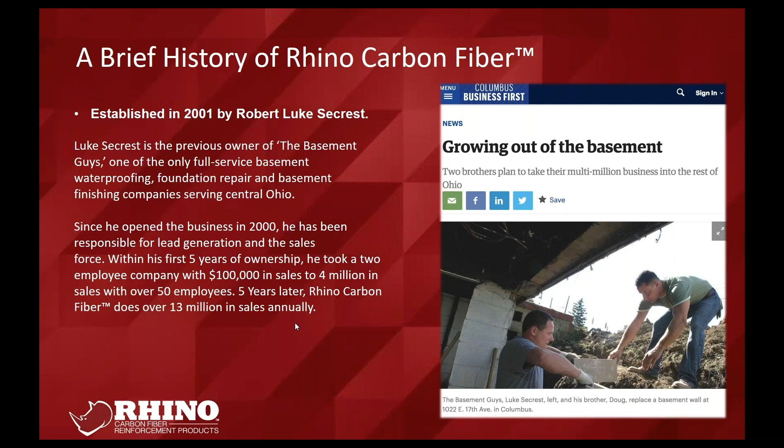So the Basement Guys was founded in 2000. In 2001, it was an early adopter of carbon fiber. We were actually using a different product at the time, and by 2003, the shortcomings of other products were excessive enough that Rhino Carbon Fiber was developed. The patented system was developed specifically for the application we're discussing today, bowed walls. We currently hold patents on that system in both the United States and Canada, and we have other products that are patented or patent pending worldwide at this point in time.

We do have a Canadian partner, a parent company, AGT Products. Their brands include Rhino, DRIcore, Barricade, and Insul Armor. So if you ever see the subfloor panel that you would put down in a basement on a concrete slab prior to installing any flooring, that's the company behind that.

Just a really brief back history on carbon fiber itself. It was actually discovered by accident when Edison was trying to develop the light bulb. That's when the filaments were discovered. He basically joked that it makes a terrible light bulb, but it's incredibly strong. Fast forward a little bit, in the 50s, the tensile strength was further developed and manipulated to become even stronger than it originally was.

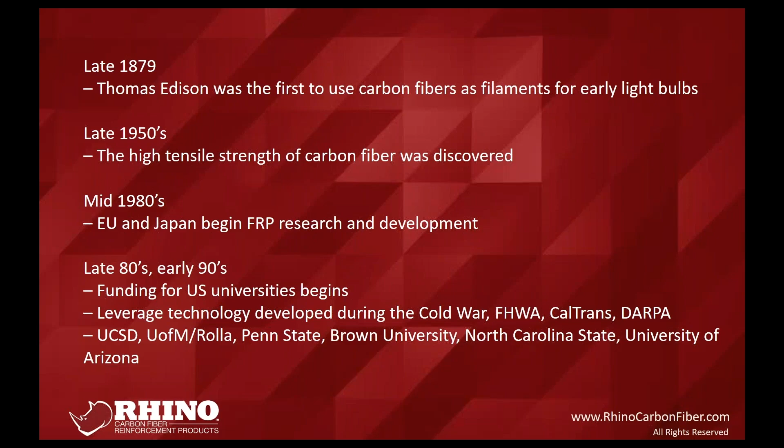When looking at a foundation wall, there are typically 4 stages of damage. You're going to have your soil expansion, and your cracks are going to develop at that point. That progresses into inward movement in varying degrees of severity. As that continues, you'll typically end up with wall shearing. That is when the wall basically slips off of the bottom block that's held in place by the concrete. And ultimately, if this is left unrepaired, you're going to end up with a wall replacement.

So we'll go through the different stages here. This is going to be your typical foundation wall. It could be block or poured concrete for the bowed wall application. It's universal. It does not matter which one you're working with.

So you've got your backfill here. Traditionally, it's going to be backfilled with stone, but a lot of times that doesn't happen. A lot of times it just gets backfilled with the dirt that was excavated on site. You end up with water that's naturally going to drain to that area. Poor downspouts, poor negative grade at the foundation wall there is going to cause excess water, and that is 90% of the problem when it comes to a bowed wall, that or the wall being totally unreinforced.

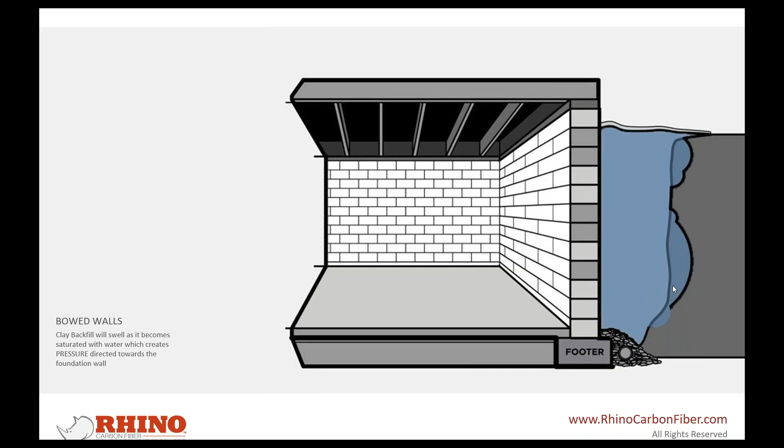Over time, as this water sits here, it gets in the soil. In parts of the country where you have seasonal changes, you're going to end up with freeze and thaw cycles that are going to basically cause this water to expand in the soil, and it's going to push it over time. That's going to be called your outside pressure.

As that continues, you're going to end up with cracking either in the blocks, mainly in the joints. For a bowed wall, you tend to see a horizontal joint that'll fail just below the surface there. That'll be what we call the hinge point of that wall. It could typically be the location with the most amount of deflection and pressure on that wall.

So you got stage 1 here, the cracks develop. Stage 2, you actually have cracks that are opening up. You'll sometimes see stair-step cracks develop in the corners. At this point, the wall has started to move inward.

That continues over time, and again, if unchecked, this is what the shear looks like. Basically, this wall just slides off of this block. This block can't go anywhere because it has dirt and then concrete on the other side, so it's held in place, but you'll end up with a wall that slips off of there.

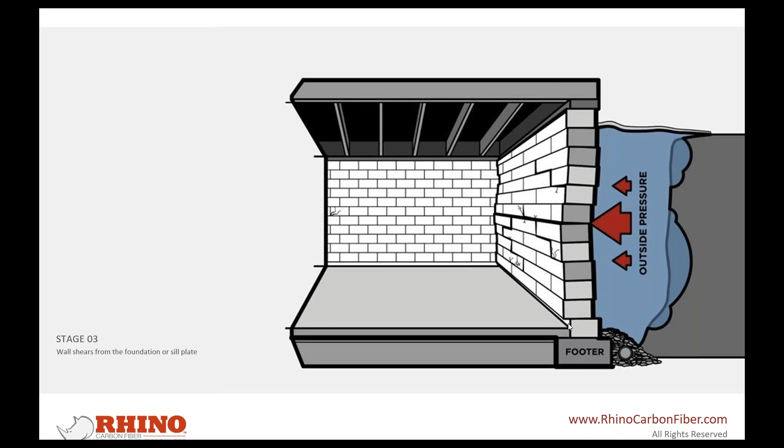And then this is stage 4. Some of you have probably seen this or been a part of it. It's not a particularly fun thing to do. Another method would be a wall push. Sometimes that's done in lieu of a total wall replacement, but if there's enough block damage and joint damage, ultimately the only option would be a total wall replacement.

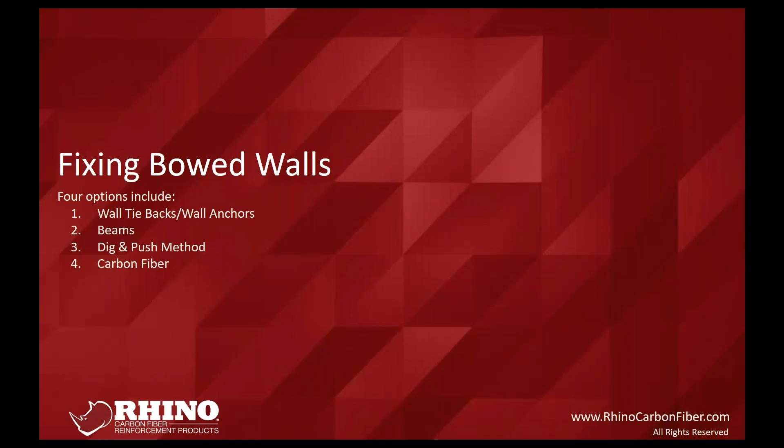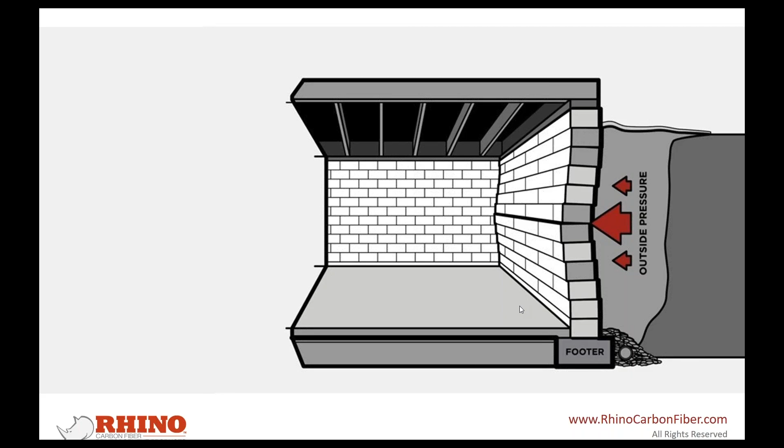So for fixing a bowed wall, there's quite a few different products on the market. We're going to go through them, some of the shortcomings of them, and some of them you can even use carbon fiber to help address some of those shortcomings. So you're taking your typical bowed wall, it's starting to move. You've had that pressure there for a couple of years, and the first one that is a very common one is going to be a tieback.

So they're fairly expensive. It tends to damage the block right around the anchor plate, just because there's enough pressure there trying to counter the forces being pushed on the wall itself. A lot of times excavation is required on the outside to be able to anchor that out. There are some systems where you basically push the rod out into the yard and then you have a plate that anchors out in the yard. Those are less invasive, but some of these systems require almost like concrete pilings or pads.

Some of the issues for homeowners would be the aesthetics of the plates themselves. They're pretty noticeable. And then, to say that you can't finish the basement, that's a little much. But if you do install a finished basement after tiebacks have been there, you have to basically install access panels so you can continually keep the tension on the rods themselves.

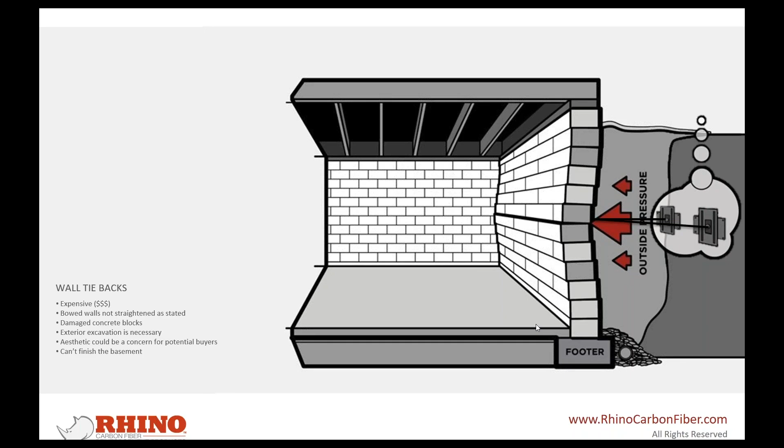So these are what your typical anchors would look like. They're going to be anchored out into the yard. You're going to have your rods that go to the wall, and then you have a corresponding plate on the inside. So these would be what you'd have to leave access panels for if a customer was planning on installing a basement finishing system after that.

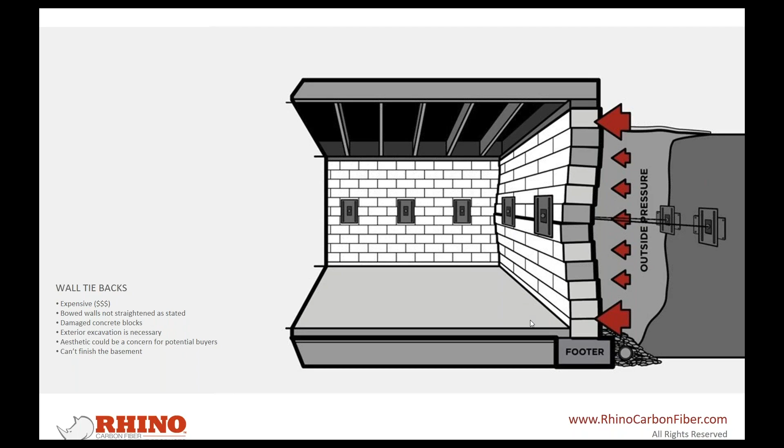So the problem areas would be you're not really truly supporting the wall in the other areas. So what this can lead to is either damage in this area, or this part of the wall can basically push if this pressure still exists, which most of the time it does, because a lot of times there's nothing being done to address the root cause of the pressures on the wall itself.

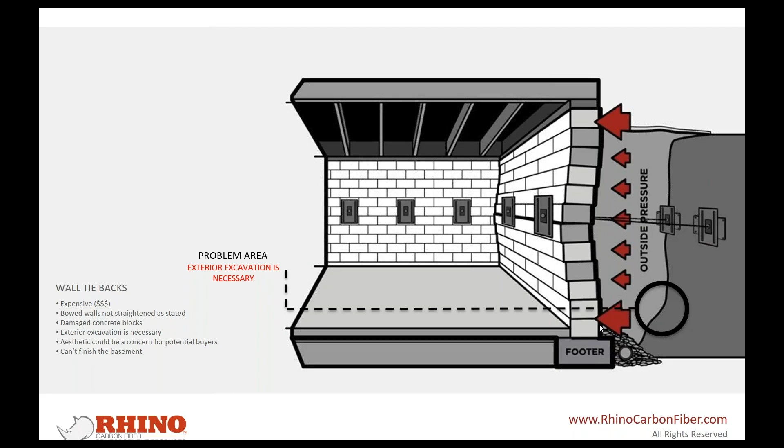So yeah, like we discussed, you've got excavation that's typically necessary, not guaranteed. And then you have shearing that can develop here or here because this is unreinforced. Now, some of our contractors that do install wall anchors, or when wall anchors are called for, they'll use a strip of carbon fiber to span from the top to the plate, and then from the bottom of the plate to the bottom of the wall.

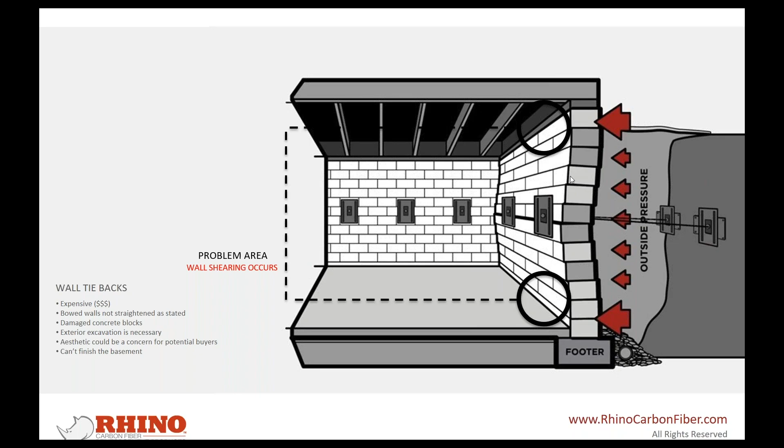What this does is it kind of helps tie everything together and helps redistribute that pressure. So this pressure that's continuing to remain is basically countered by the tensile strength of the carbon fiber. Some guys will even go as far as to create whalers of sorts with carbon fiber between these locations just to increase the load capacity of the wall itself. So that's something to keep in mind if you guys do install wall anchors or they're called for. Just be mindful that you can use multiple products to create a better repair.

This kind of explains the real drawback of some of the anchor systems that are out there. Not saying that all of them cause this type of damage, but it is a possibility if installed incorrectly. So this is kind of a bird's eye view of the top of the wall looking down into it. So these would be the hollows of your block.

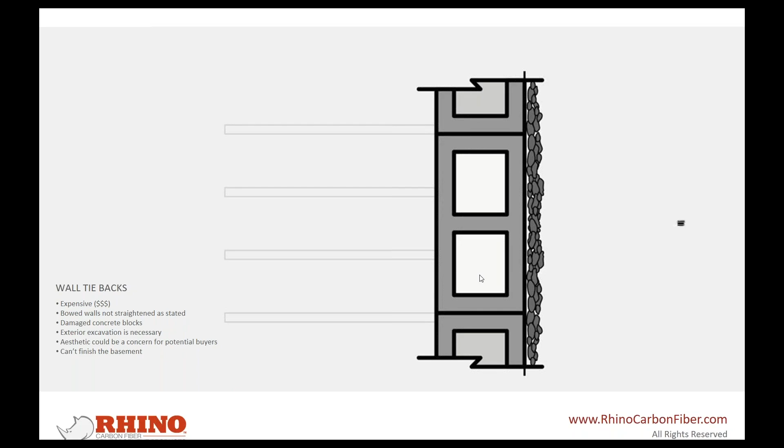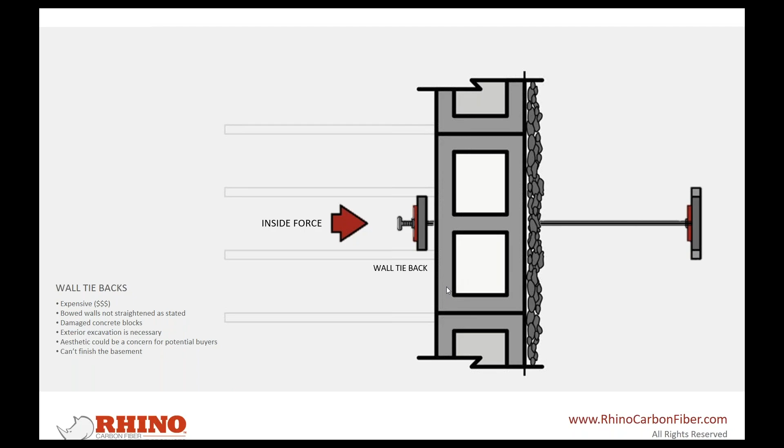So you have your rod that comes through your tie back plate, and as you basically install that and you create the force to get that tight and to keep the tension on this system to keep the wall from bowing inward, you basically have your inside force, your outside pressure, and over time you can develop cracks in the block itself, and that would essentially lead to crushed blocks or damage between the actual plates themselves.

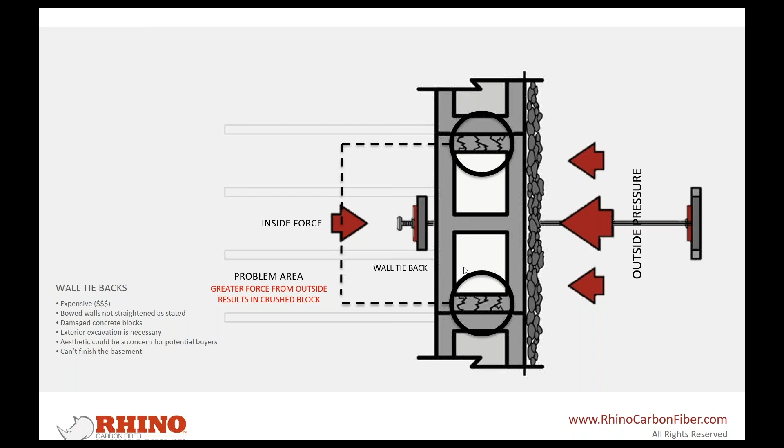The next one is probably the most common because it's been around the longest. This is going to be your stationary beams or just your typical steel I-beam that's installed in the basement. Drawbacks are they're fairly expensive. I mean, there are parts of the country where you can get steel for pretty cheap, but if you're the guy that's paying for some of the beam systems that are out there, you're paying quite a bit in shipping just to get it from door to door.

They're extremely obstructive. They stick off of the wall. You're going to end up with quite a bit of lost space in a finished basement scenario. They're very, very noticeable when your customers would go to sell their property. It's almost guaranteed that it's going to get noted on an inspection, possibly even find some issues with it just because of the amount of attention that it draws. That tends to be a little bit scary for prospective buyers.

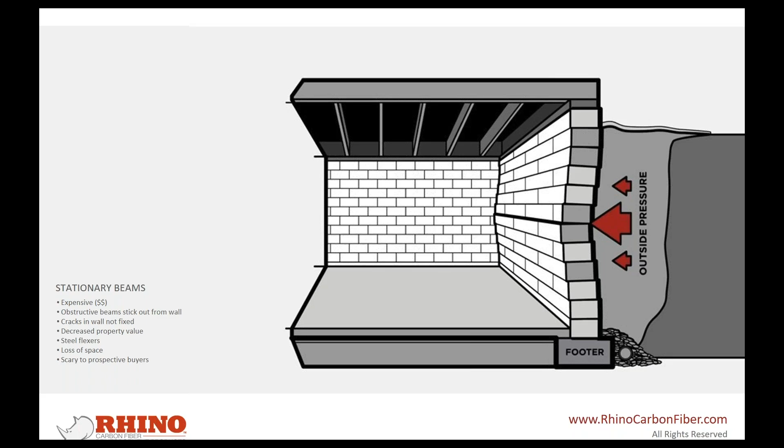And then there's just a lot of room for interpretation as far as how that process is done and done properly. There's a lot of different methods for installing steel beams. You end up with a lot of blocking in a lot of the situations. So we'll go through some of the differences here. So to start out, you're going to have to open up the floor to get the beam set on the footer itself.

Typically it's going to be a 13-pound I-beam that's called for. So that's going to be about 6 inches of steel on the wall itself. And then you basically concrete that back in place. Then you have your bracing up in the floor joists there. Typically code calls for a minimum of 5 joist cavities uninterrupted for proper bracing for the top.

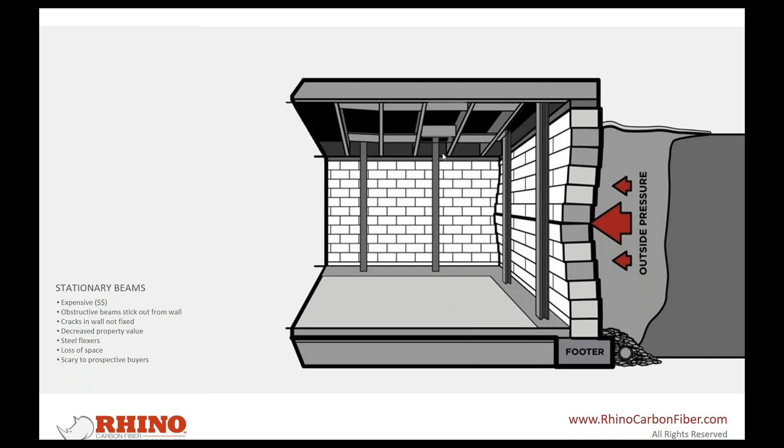If your joists are running parallel with the wall, you then have to basically use 6x6s and things of that nature to get those lagged in and tied in properly. So really it's extremely time consuming. You end up with a lot of lumber that has to be involved in that as well.

And then one of the shortcomings of that is you tend to tweak the floor joist when you do that. So you're basically taking this load and you're putting it up into the floor joist. And you're creating a situation where there's a lot of load on just simple 2x material that's not really designed to take that kind of load.

Another issue with steel I-beams is since this is a rigid, straight piece of steel, it's only really making contact with the part of the wall that's bowed the most. So that leaves you with cavities behind the beam and the wall itself. So you essentially have to backpack that with concrete. Pretty tough to get it done completely, to get really nice solid fill in there. It's something that a lot of guys really struggle with.

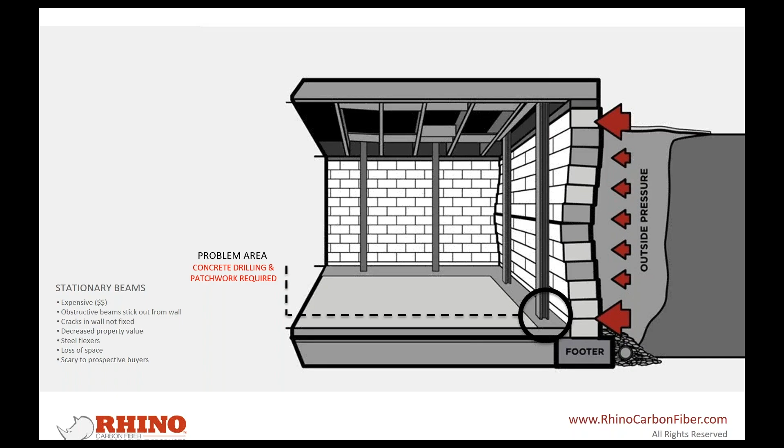It is time consuming, but the most critical thing with a steel I-beam is to get that area filled, and unfortunately that typically does not happen. If you don't do that, it allows the wall to basically continue to fail to the point where it hits that steel I-beam. So essentially the beam has to catch the wall before it actually is in tension. That's what's called wall shearing.

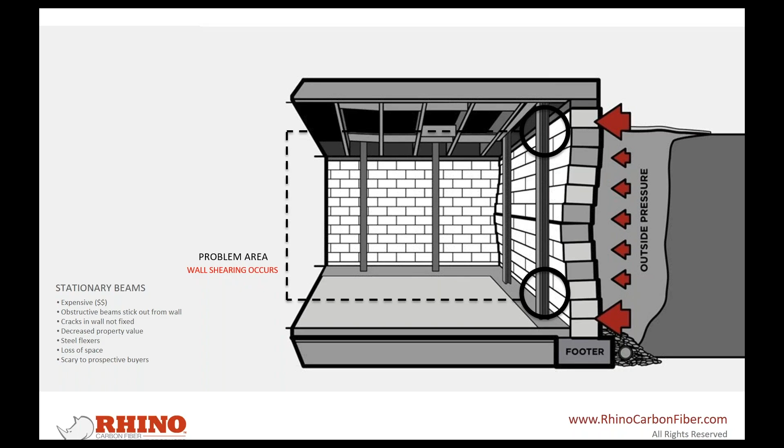So your power beams are going to be pretty similar to a steel I-beam. The main difference is they like to promote the idea that you're going to be able to straighten the wall. Again, the issue with this is because of the top bracket, you're putting a lot of pressure onto those floor joists, pretty much in excess of what that wood is capable of taking. So the opportunity for floor joists to bow or to break over time is pretty high.

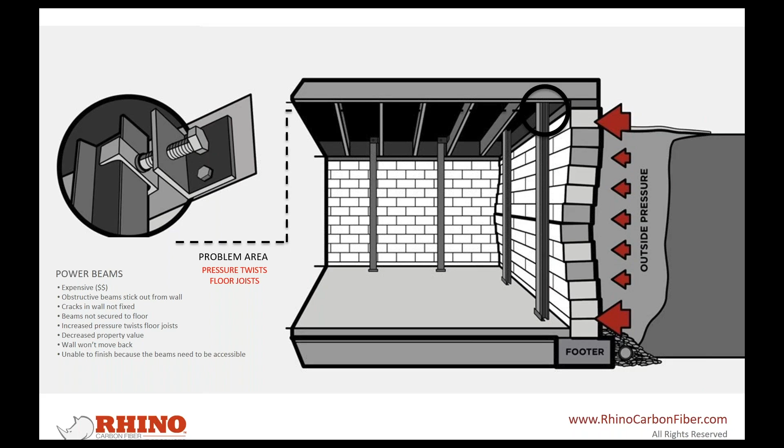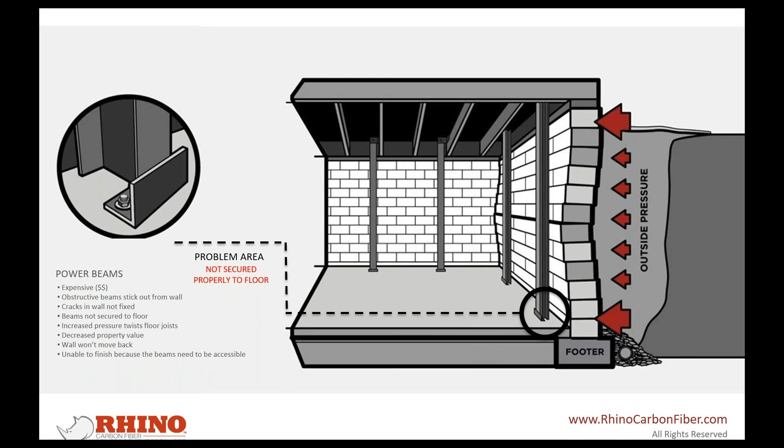You have a lot of the same negatives that you do with a steel I-beam as far as the application and some of the aesthetic issues of it. Again, your beams aren't going to touch the wall. But the real thing that is kind of bothersome is a lot of those systems don't actually remove any concrete. So you're essentially relying on 2 bolts into the concrete of an unknown thickness to hold that pressure at the base there.

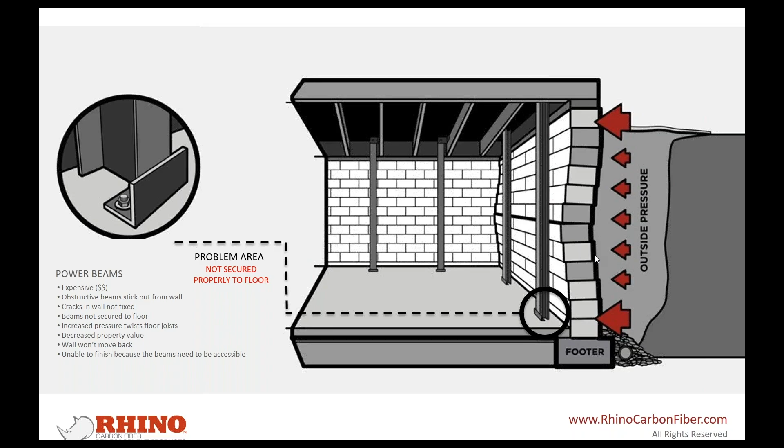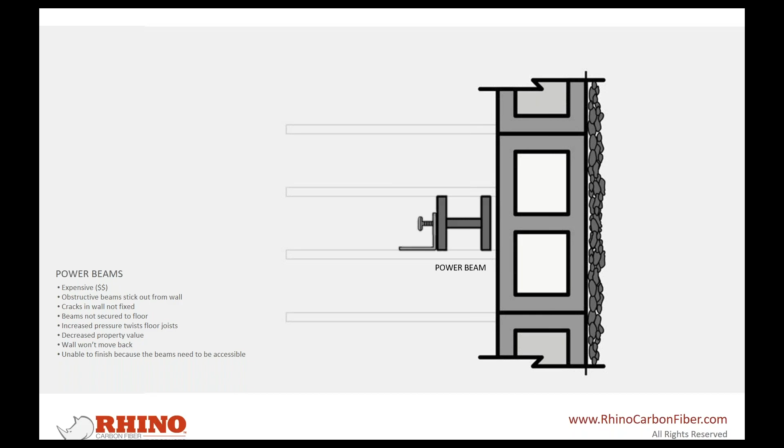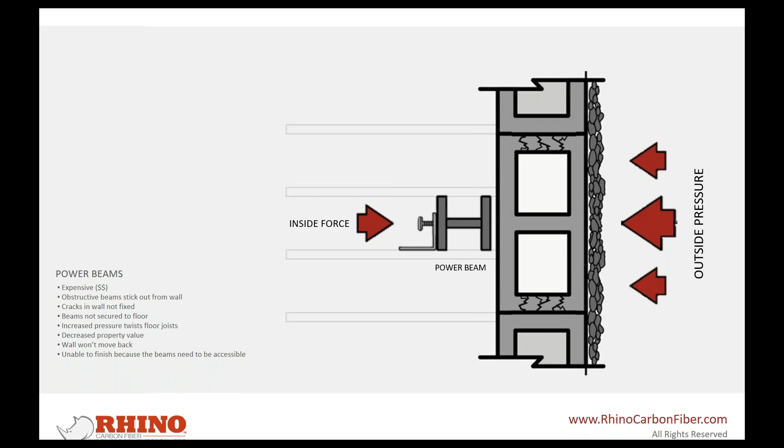This is again going to be kind of a bird's eye view of the wall itself. You've got your beam on there, kind of similar to a wall tieback as far as what you're exerting on the block itself. Again, your outside pressures, your inside force, very similar to a tieback. It's going to create damage to the block itself.

The theory of it sounds really nice. The practice of it is a little bit unlikely to happen. I mean, you've got tons and tons of dirt or gravel sitting on a wall. So you can think back to that slide that showed the pressures being put on the wall from the outside. If you just tell homeowners to crank on this thing a couple times a year, it's not going to take real long before they end up damaging the block.

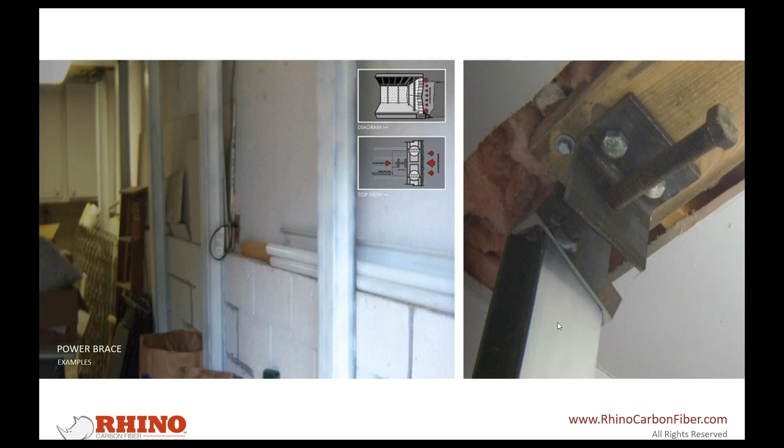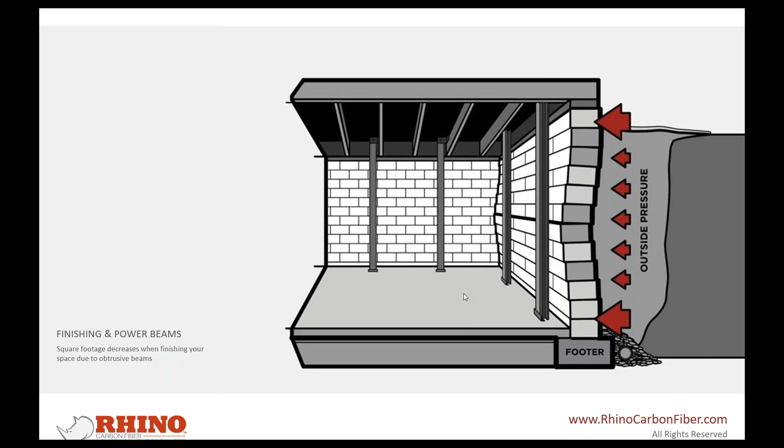So for a lot of people, the biggest shortcoming of this system would be the loss of space. You're typically going to have about 6 inches of steel on the wall. You have to frame away from that. So you're going to lose about a foot off the entire perimeter of the basement. So if you have a 20 by 20 basement, you just lost 80 square feet of living space.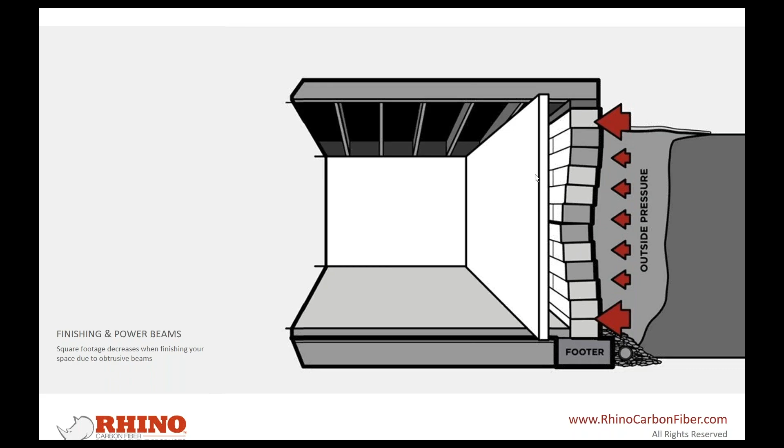For a lot of people, that's just not acceptable. They're not going to go through the added expense of finishing a basement if they're going to lose that kind of square footage. Not to mention, you're not really going to have a good feel for what's going on behind here.

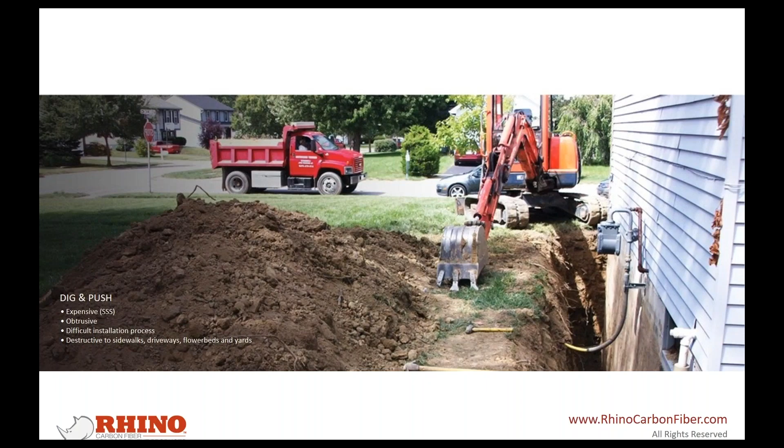So the dig and push is basically a last-ditch effort to save the wall. It's extremely time consuming, it's dangerous, and it still has to be reinforced after you get the wall pushed back into place. If you were to just push this wall and reset it, put the soil back on it, it would very quickly go back to where it was.

So this isn't a fix as far as permanently repairing the wall. You have to do something to reinforce the wall, or you'll be right back where you started.

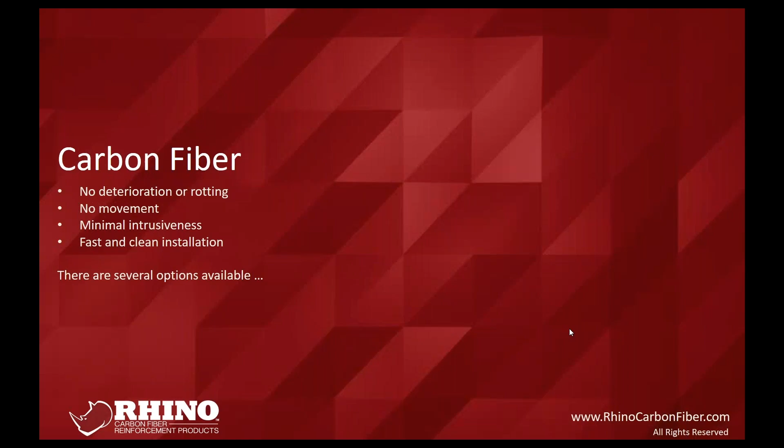So this is where the carbon fiber portion of it comes in. We're going to briefly discuss some of the other options that are on the market, just so you guys can be educated as far as where we're different from other systems in the market. But the benefit of carbon fiber in general, regardless of the manufacturer, is going to be no deterioration. It's going to limit the movement, or in most cases with our systems, it's going to completely stop it. It's going to be extremely minimally invasive, and it's fast and clean.

So the carbon fiber typically ranges, depending upon the manufacturer, anywhere from 4 inches to 12 inches wide. It just depends upon the manufacturer. There's a plate material that's on the market. It doesn't have any connections to the top or bottom. The epoxy is kind of difficult to get to bond to the plate, because you can't really tell if it's saturating properly.

But it's going to basically come up to the top of the wall, stop, and it typically stops just below the floor. That's going to be really common for most of these systems, because we're the ones that hold the patent on the top and bottom connection. So your outside pressures are here. They're pushing. The tensile strength of the carbon fiber band is doing what it's supposed to, but due to the lack of your top and bottom connection, over time, as that pressure continues, you end up with shearing, just like you do with the plates and the beams.

And this is where carbon fiber, in the infancy of it, engineers would say, well, yeah, it's going to hold the wall together, but is it really going to do anything to hold the wall in place? And the answer was no. And that was the issue we had with the system that we were installing way back in the early 2000s.

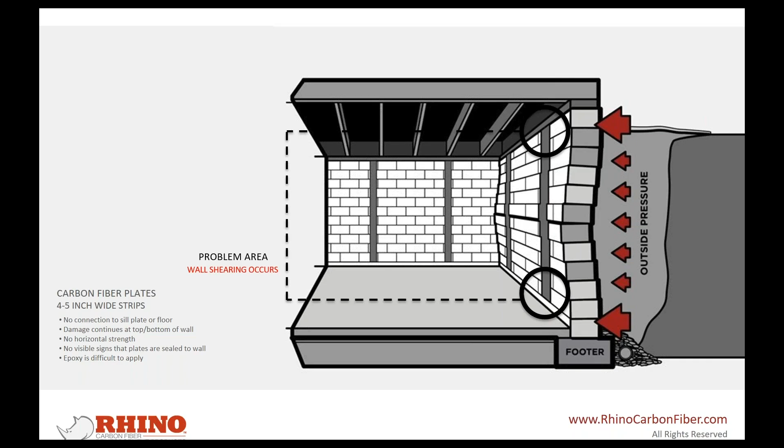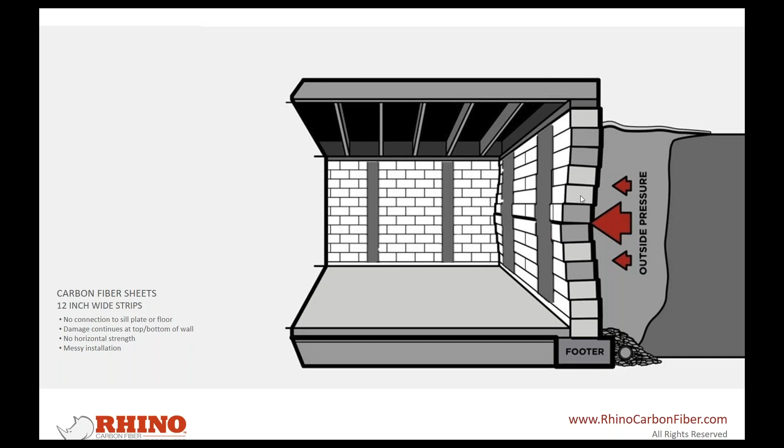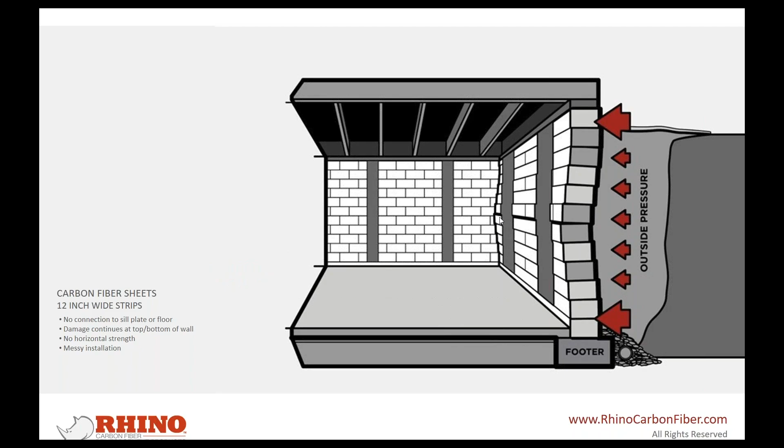So the next one is going to be your 12-inch wide strips. We use this for general crack repair purposes. We do not use it for bowed wall applications, simply because there are no connections with it. But there are some systems out there that use this to reinforce a wall. It's going to be the same scenario as the plate. You have no top and bottom connections, so the wall can basically shear in as one. And when you do this, you end up with a pretty bad failure.

Another shortcoming of the wider strips is you're encapsulating the entire face of these blocks, so they can't wick moisture like they're supposed to. Blocks are naturally porous. They're designed to channel the water. If you encapsulate the entire surface of a block, you run the chance of water being held in that block, and over time, the moisture will basically peel or delaminate the carbon fiber.

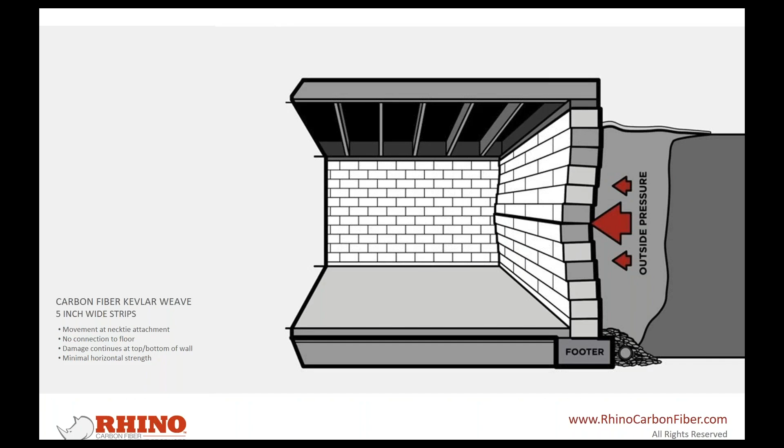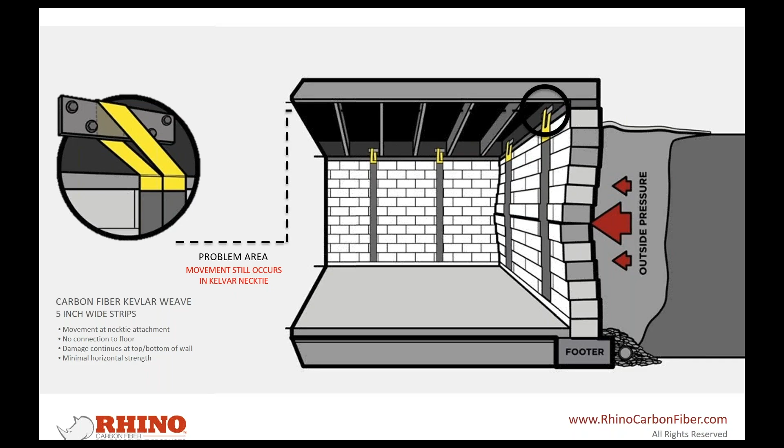So the next one we're going to talk about is the carbon Kevlar blend, the straps. I'm sure most of you on here probably know which ones we're referring to. They were the ones that originally came up with a top connection, and that was in response to the fact that they were starting to experience issues with walls shearing in. So they created a necktie at the top. The only problem is it's not really in tension. There is a way to get it in tension, but unfortunately, most of the time they're installed in a method where there is no tension present on that connection.

They're also installed into the rim joist rather than the sill plate, which is an acceptable method, but your opportunities for movement up there, due to the distance between the wall and the rim joist, are much higher than going into the sill plate itself. The real shortcoming of the system was you still had no bottom connection to tie in below the shear point.

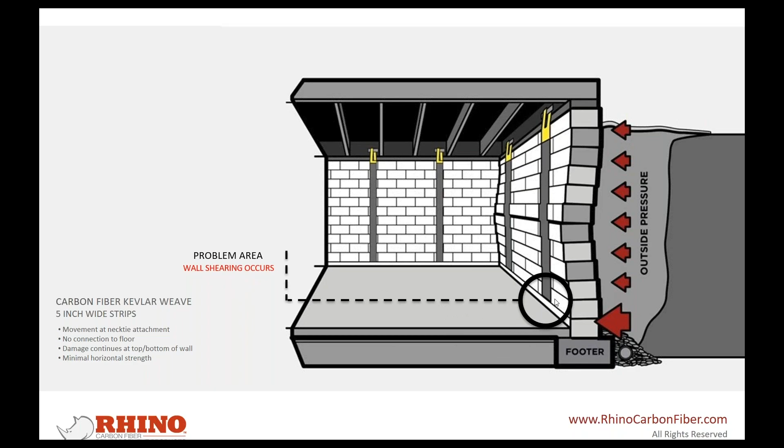And this is what happens when you have a wall that does not have any connection. Again, I oversaw this project. I received a call from somebody that had purchased this home several years before, hadn't really shown any signs of issues. She called late on a Friday, said, hey, I think I have a problem in my basement. I said, okay, fine. I'll have a guy come out, or as early as I can get there would be Monday morning. And she accepted that.

So the benefit of carbon fiber, as far as your space savings, this is going to be universal for all of them. It's going to finish smooth, flat to the wall. You're not going to experience any loss of space. Typically by the time you prep your walls, the thickness of the concrete that you removed is essentially equal to the thickness of the carbon fiber. So the fiber almost ends up being flush with the block around it.

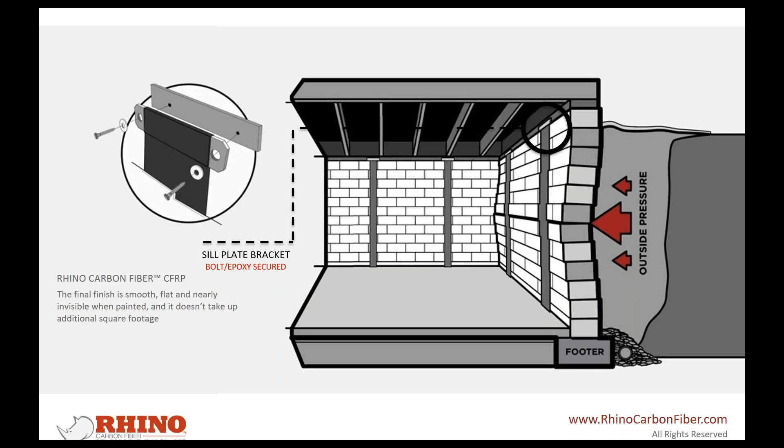And then for the bottom, we have our carbon fiber pin. Most of you guys that are on here, you know the process. But essentially the point of this is to get you into either the footing or into the slab itself. So as this pressure is exerted on the wall, this block can't slip because it has an anchor point below that final block that's held in place.

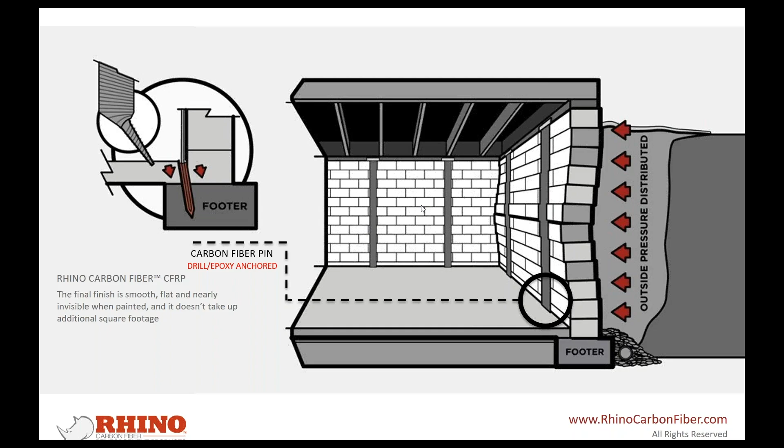As you saw from the previous pictures, it's obviously very important. We've been around for over 15 years at this point, and we've had 0 failures. And engineers basically spec this as a requirement now for bowed wall application.

Another benefit of our system is you can paint it. We've done everything from $10 a gallon, the cheapest paint we could find at Lowe's, up to high grade like Drylok systems that have fiber mesh in them for waterproofing, stuff like that. Everything sticks to it. We get the question sometimes as far as when to paint it, and it doesn't really matter. We have guys that'll paint when the epoxy is still tacky, or you can wait the 2 days for the total initial cure time on the epoxy. It doesn't matter, and it can even be done months later.

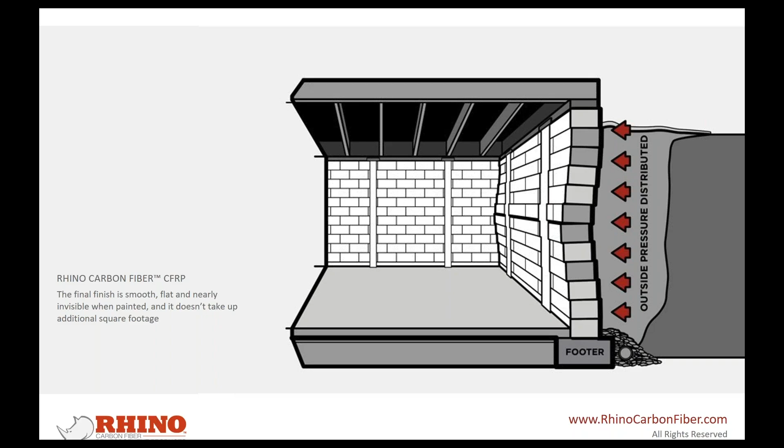We get the question a lot: is the sheen of the carbon fiber epoxy too slick for paint to stick to it? And the answer is no. The only thing that doesn't stick to it is the base coat of Drylok. So if you use a 2-stage Drylok, the base coat or the waterproofing agent won't stick to it.

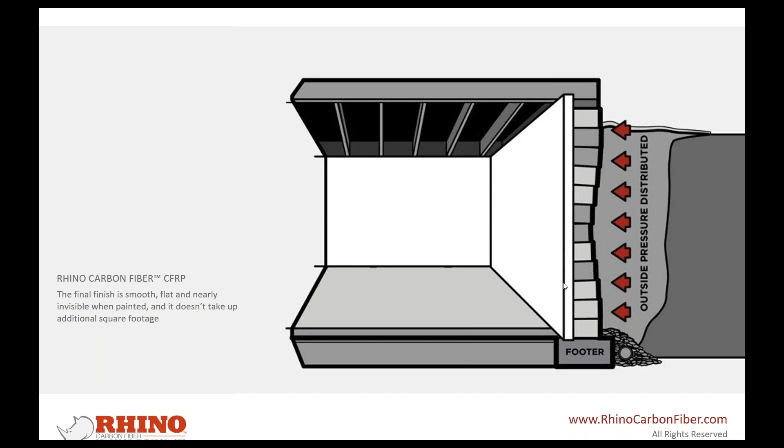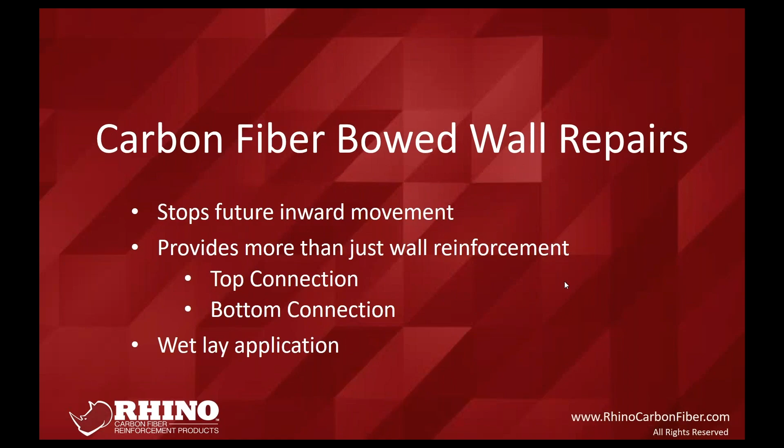We'll jump into the training portion of it. I'm assuming this is probably what most of you guys are here for. So if you haven't already figured it out, the main point of the carbon fiber is to stop inward movement. Our system has the top and bottom connections, and it is a wet lay application. It's very important that it's a wet lay application.

You know that simply because when you receive the fiber, it's going to be just a woven raw fabric at that point. So it's going to conform to whatever angles you need it to, whatever surface you need it to. There are no restrictions to it. You're not going to have to get creative as far as holding it in place or getting it to conform to the wall itself.

The advantages, obviously, as we've discussed already, it's patented and engineered and warranted. The warranty is 25 years for the structure itself. Any issues, we replace the material or provide additional material. There is no excavation required unless the wall is past 2 inches. We typically recommend that the wall be pushed at that point.

It's extremely fast installation. I used to have crews that could do 25, 30 straps in a day. You get a couple of guys that are comfortable with it, they can knock some serious carbon fiber installations out for you. It can be used on both poured concrete and CMU, so it's very adaptable. As we discussed before, it can be utilized with other repairs, and then the thin profile.

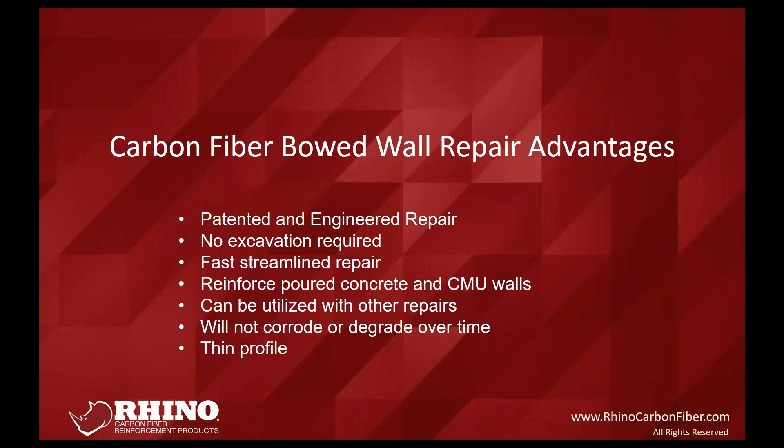Either one of them are going to be more than adequate, and they're both going to be designed to a factor of 2. Basically, that wall is going to be twice as strong as it needs to be to counter the forces that are on it. So these are going to be real world looks.

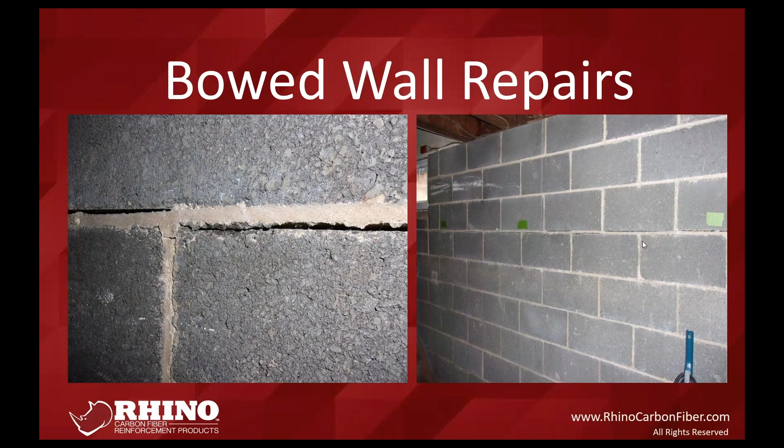This is going to be your typical telltale wall damage that you're going to see. That's going to be your indicator for inward movement occurring. Like I mentioned, you have this joint that fails just below the soil level. That's where the wall starts to hinge.

So you have your 2 inches of maximum deflection on the wall, and that's just kind of an ASTM industry standard. Anything in excess of that's just not a real great idea. It's not really a good return on investment for your homeowners, and exceeding 2 inches is just not considered a safe measure. We can do it. We have done it, but it's typically not recommended.

So what you're going to do for your bowed wall applications, you're going to start 2 feet from a corner, and then you're going to have 4 foot on center maximums. In the event that you get to something that's going to interfere with that 4 foot maximum, like a window, you basically have to close that spacing to avoid that obstacle, and then you can start your 4 foot spacing over again.

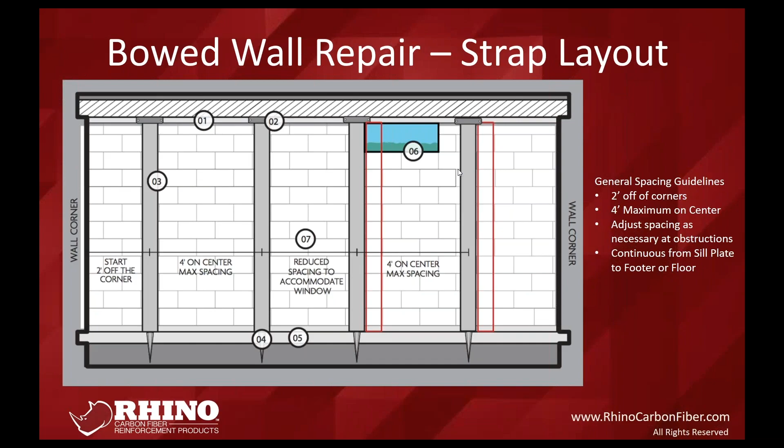It could be a window, it could be plumbing, it could be electrical that's there. It could be as simple as a water line that's running on a certain part of the wall up at the sill plate, and you don't want to take the chance of moving it and breaking it if it's old copper or something like that. So you just have to note those things so you're not sending a crew out there unprepared, or you end up having to install a strap or 2 at no cost because you didn't catch it during the original inspection.

So your wall prep and your joint repair is going to be the most critical point of any carbon fiber application. I kind of always say it's like painting a car. The results are only as good as your prep work. And in this application, it truly is 100% the case.

So what we recommend is to grind the surface of the strap locations with a diamond cup wheel attached to a HEPA shop vac so you can confine all the dust. But what you want to achieve is a bare block to where you can see the aggregate in the block itself. And this is done even if the wall has never been painted. It could be a brand new home that's never been dirty, has zero damage and zero coatings on the wall itself. You still need to grind to get to the aggregate on the block.

So typically for block applications, we recommend that you use your vertical mortar joints, your opposing vertical mortar joints, as your guidelines for what you're going to grind. That's going to be the easiest way to keep the prep area straight and kind of give a uniform appearance.

If the sill plate is recessed, which it's most commonly going to be, just kind of slightly round out that top edge with your grinder when you grind that final block. You don't have to go crazy and create, you know, a certain angle or anything like that. You just want to round that top edge out so the carbon fiber can kind of ease over that top final block and make its way back to the sill plate.

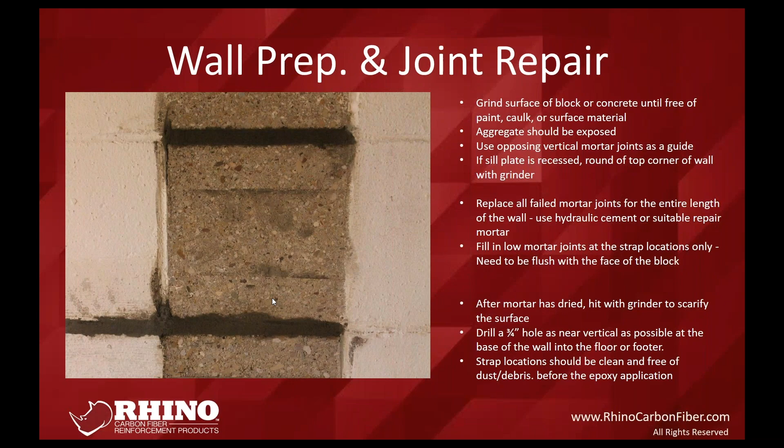So your top sill plate connection is really simple. You're going to go ahead and pre-drill your sill plate locations for the lag bolts so you don't split the sill plate. Once you've done that, you're going to wet out the top 6 inches of your carbon fiber. Go ahead and trowel that in place with your plastic putty knife or whatever it is you want to use to disperse your epoxy there. But yeah, get the top 6 inches laid out. Go ahead and lay the bracket into it, and you're going to roll it 2 complete times.

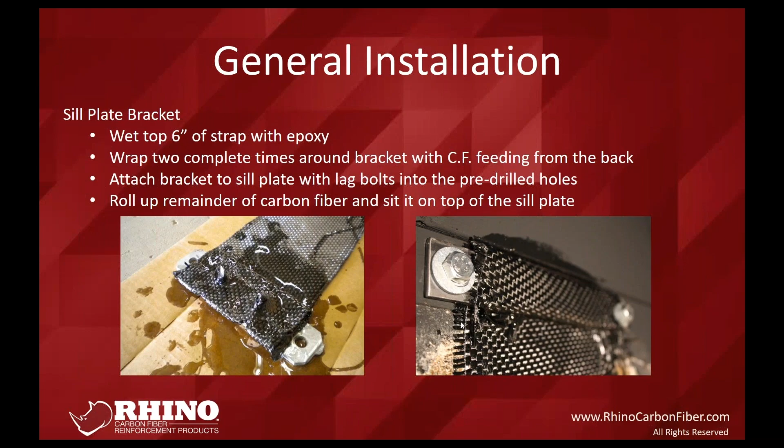The other thing to look for is to make sure that your carbon fiber on the final wrap is coming down and behind the bracket here. If you were to flip this around and have the carbon fiber coming over the front side of it, this would not be in tension any longer. So it's very, very important that the carbon fiber is coming up and behind and then straight down behind the bracket itself.

Once you have everything secured at the top, go ahead and drive your lags in. You're going to roll the carbon fiber up, tuck it up into the floor joist, get it out of your way, and you're going to go ahead and start to apply your base layer of epoxy. You just kind of go back and forth in a zigzag motion. You want to make sure that you have a uniform wet appearance.

Couple of things that are kind of helpful tricks. Only apply the epoxy for about half of the wall, and then go ahead and trowel it out into place. This will help you from the epoxy running all over the place. When you apply it in these beads, it tends to get a little bit heavy and it wants to roll. So if you go ahead and evenly apply that, get it troweled out, it'll stay in place. And then once you have the top half of the wall done, go ahead and do the bottom half of the wall. Get that troweled out. Look for any dry spots.

And then also something that we get a lot is guys say that we don't provide enough epoxy in the kit. There's two things to note there. One, you're not building a finished car part, so you don't need a super thick layer of epoxy on the outside. And where a lot of guys find that their epoxy is going, when you're troweling it out, it tends to build on the outside edges of the strap location. So you'll end up with a really thick bead just outside on the edges of the carbon fiber where it's not doing anything. So once you start troweling out your epoxy, push all the epoxy back to the center where the strap is truly going to be installed, and that'll help a lot with your epoxy consumption.

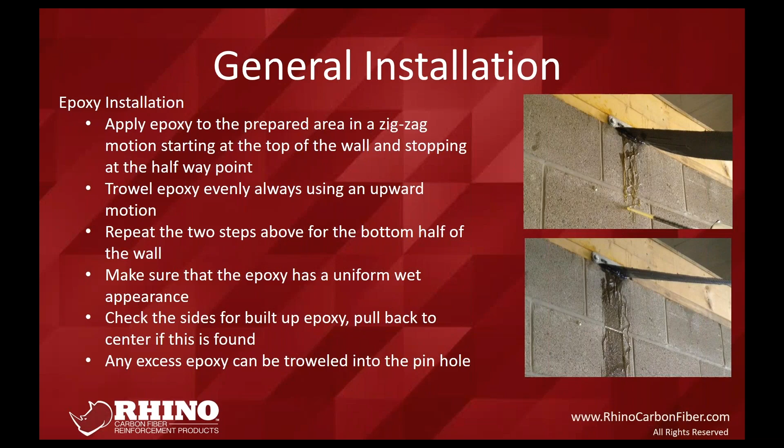So at this point, you're going to go ahead and unroll your strap. You're going to pull it tight, and then you're going to lay it into your epoxy, working from the top down in this portion of it. This is going to allow you to make sure that you're running straight, and then once you have your strap positioned where you want it, go ahead and cut the strap if necessary. Leave yourself 6 to 8 inches of material running out onto the floor. That's going to become your bottom anchor.

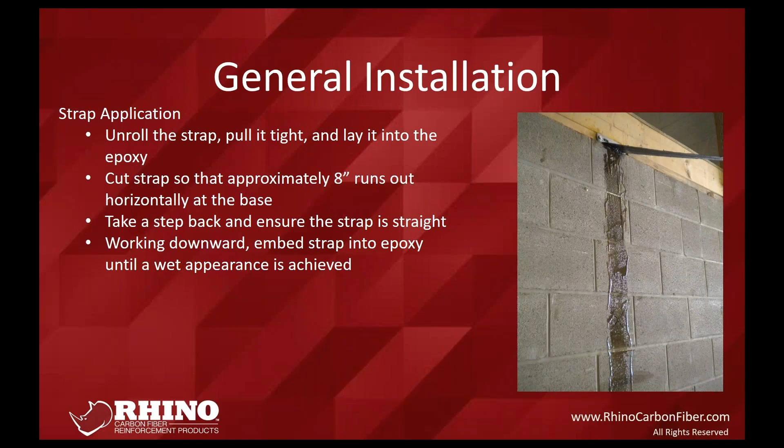Do a final check, make sure that the strap's as straight as it can be, make sure that there's no ripples in it. Check and make sure that there's absolutely nothing going on, because the next step is going to be installing your final top coat of epoxy. It's going to be the same thing as your base coat, but it's going to be a lighter coating. So your back and forth zigzag motions are going to be much wider because you're putting less material out there. And the final result is you want to make sure that you have a truly wet look on the entire surface of that carbon fiber.

And then the final step is going to be your bottom pin. It's not a separate component. There's no additional materials that go in there. What you do is you take that 6 to 8 inches of carbon fiber that you've left out on the floor. You're going to fold it. You're going to get it wet.

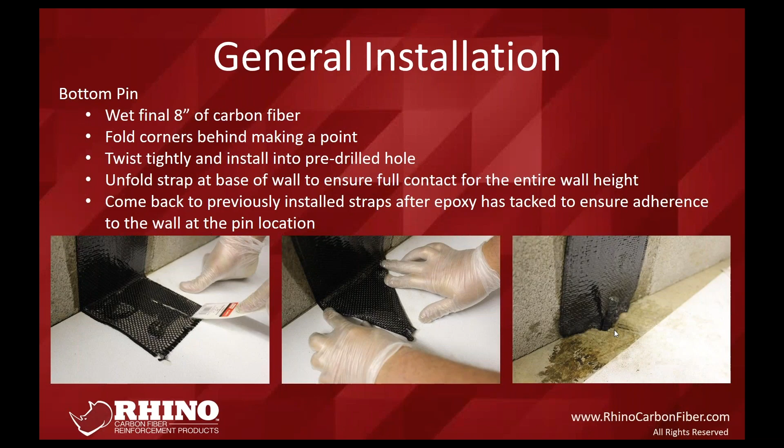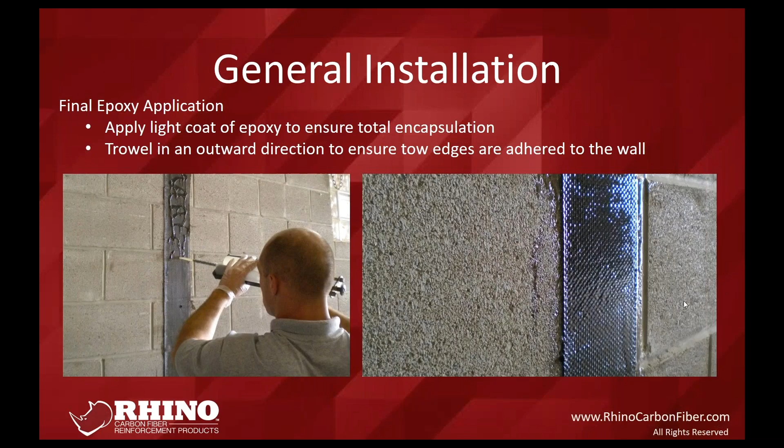And then you're going to do your final coat. Obviously by doing that bottom pin, you're going to manipulate that strap a little bit. You're going to pull it off the wall a little bit, just getting that set. So this is going to be your final coat at this point after the pin is set.

So some of the adaptions that you can do to the system itself, and these are just kind of footnotes to conversations that we have from people all across the country. It's not really common, but it does happen where you're going to run into a home that doesn't have a sill plate. In that case, you go straight to the rim joist. That's the best case scenario.

If there is no rim joist, sometimes you'll have floor joists that are toothed into the block, or it's poured concrete all the way up to the subfloor, or there's like a cold cellar that has a concrete pad that's poured directly on top of it. In that application, you're going to run a strap horizontally across the length of the wall. And what that does is it basically ties all of the straps together. So if there were to be like a point load on one location, it basically redistributes that tension across the top of the wall and calls on strength from all of the straps rather than one having to take the brunt of that force.

Another thing we get a lot is, what do I do with existing drainage systems? So if you come to a home that already has a drainage system in there, some of the systems sit far enough off of the wall to where you can still manage to get your drill bit in and drill for the bottom attachment. Obviously, you're going to have to go to the footer in that application, so make a note of that because you'll probably need to order a larger strap as far as the length goes to be able to hit that depth.

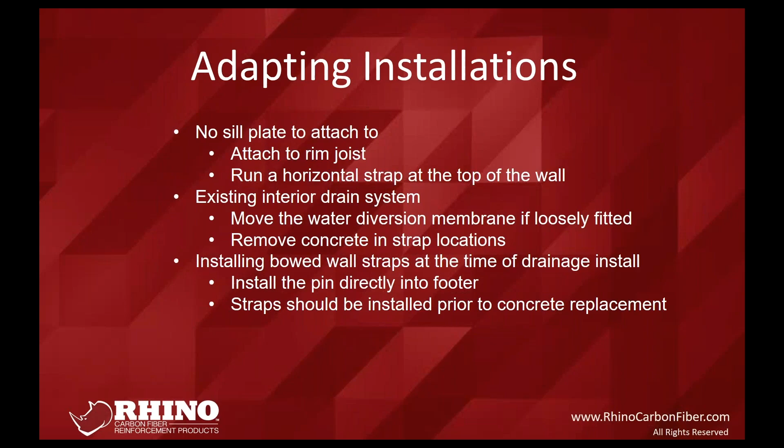But we get the question of, if I'm doing these straps at the same time as a drainage system, do I still have to pin them? The answer is yes. The weight of the concrete that you're putting back isn't going to be enough to hold anything, and a lot of the times with the waterproofing membrane, they're not going to be in direct contact with the straps themselves, so still pin it. It's actually the easiest time to do the pin because you have direct access to the footing itself.

So this is how to streamline the installations, and this kind of comes from my time of managing crews. The most efficient way to do this is to break the job up into certain tasks for each team member. So typically one guy would go in after everything was tented off and covered. One guy would start grinding immediately and keep going. And the other person would be pre-drilling the holes at the bottom and pre-drilling the sill plate bracket attachment.

By the time he had completed that, the guy that was grinding was on strap 4 or 5 location, and the guy that was doing the sill plate and the pinhole drilling would go ahead and start installing the carbon fiber. That's the most efficient way to do it. And then once the team member that was doing the grinding finishes, he can either start installing the straps as well, or he can go back and start manipulating the bottom pin locations to get those as clean as possible.

And then he can start doing general cleanup at that point, because once the grinding is done, your plastic can come down. Obviously, still leave it on the floors, but he can start getting stuff out of the basement, tools cleaned up, things of that nature.

Before you leave the job, you want to check the edges of the carbon fiber for the tow to be laying flat. We want those to be really well bonded with the wall itself, not for strength purposes, but for safety purposes. If you have those little tow ends hanging up, once they cure out with the epoxy, they're going to be really thick razor blades. They're super sharp. So that's something to check for. Make sure those are laying flat.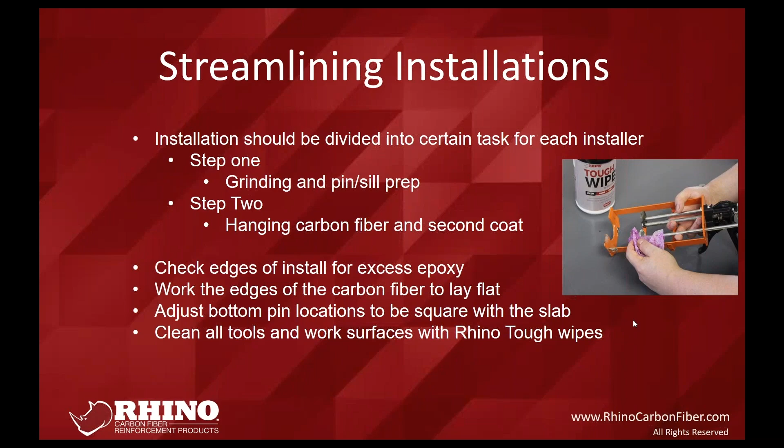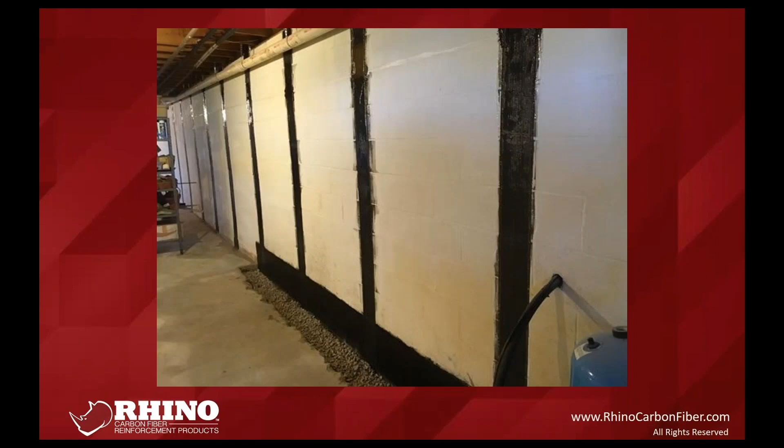This is an application where the wall had already sheared, which is fairly common. A lot of times people let this go longer than they should. And the engineer on this job called for bowed wall reinforcements, and then he also wanted to have this installer do a 1 foot wide crack repair at the bottom to basically grab a hold of that bottom course and the one that's directly above it where it shears.

He just wanted additional tensile strength in that area to offer more strength in there. Now, if you have a wall that's sheared like 2 inches at the bottom, typically what we recommend is you would install your straps normal, but then you would knock a hole in between each strap location and put in a piece of rebar and fill that full of mortar.

And what that does is that basically creates another form of defense against that shear getting any worse. So it basically gives you additional shear load capacity by doing that. So in times of severe shearing, that would be what we would recommend. We get that question quite frequently as well.

So some of your additional uses for the carbon fiber, specifically the bowed wall width, would be crawl spaces. That's always a really tricky one to handle because a lot of times there aren't floors. So your beams aren't going to be a possibility. Plus, nobody really wants to army crawl an I-beam into a crawl space. So it's much easier to get a carbon fiber in there.

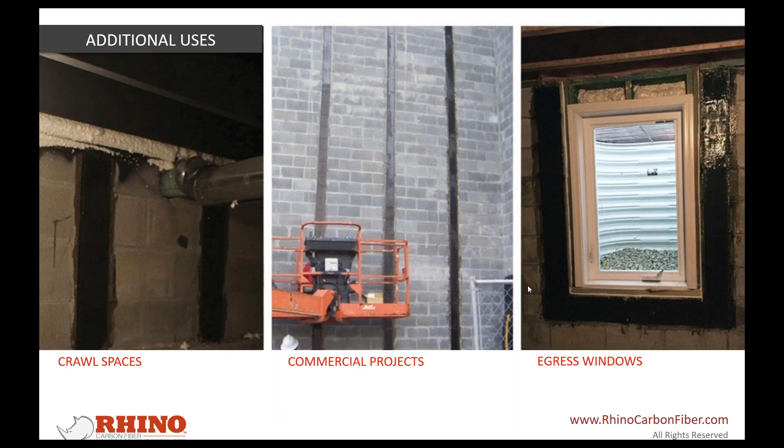And then a lot of guys will do this at the time of egress window installs. And the point of that is you're obviously removing a large portion of the strength of this wall by putting that window in. So they'll install the carbon fiber there just to prevent any future damages that could be caused because of that opening. It could be used as a lintel, again, crawl space openings, any type of opening in a wall that exists, the carbon fiber can be used to reinforce it.

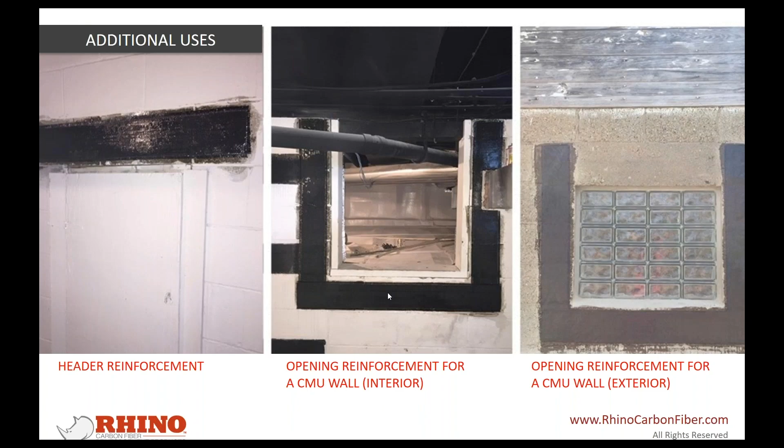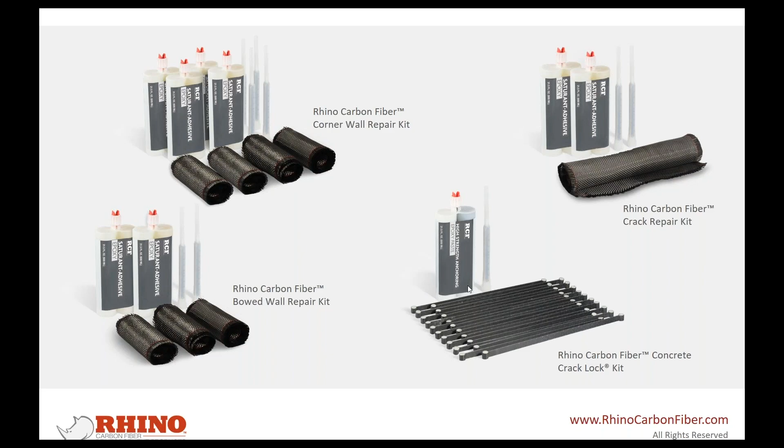So your competitive selling aspects of the carbon fiber system that you can really hit on, it's going to be the least invasive way to address a deflecting wall. Our system in particular is going to be engineered and warranted. You have complete contact with that wall, the entire length of that wall. So kind of a takeaway from the previous slides that we looked at, just about everything else on the market doesn't support the entire wall, top to bottom.

Carbon fiber does. They're not going to lose any space in their structure, and they don't have any continued maintenance. So they don't have to go down and tighten things. They don't have to go down and keep an eye on, you know, what's my soil level look like as far as, is it off the wall? Can I tighten this thing? The carbon fiber is pretty much you install it and you don't have to worry about it any further.

And again, it's adaptable, and that's important to you guys because there's pretty much a workaround for just about any scenario that you could come into. We've seen a lot of things and helped a lot of installers and contractors with adapting the design to be able to suit the job that they have in front of them.

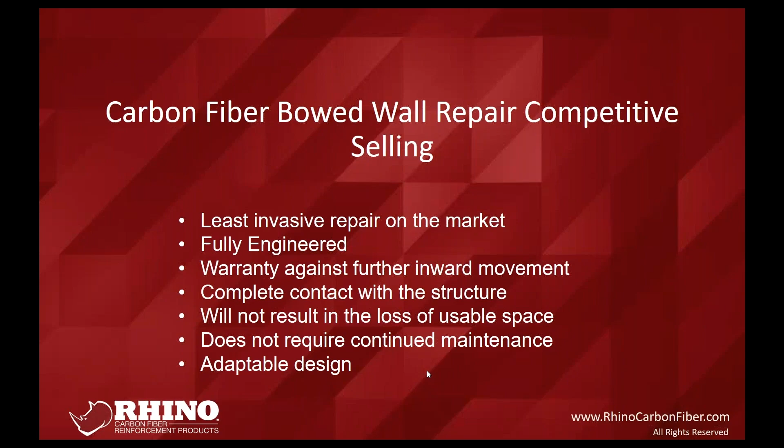So some of your upselling opportunities with the carbon fiber would be some of those other products that we just briefly discussed. There are situations where installers are teaming up with new home builders to use the carbon fiber as a preventative maintenance measure. Basically, they do the installation at the time of the home being built to keep any damage from occurring, and then therefore the home builder gets to increase their warranty on that structure. So it gives them a competitive edge against other builders in the area.

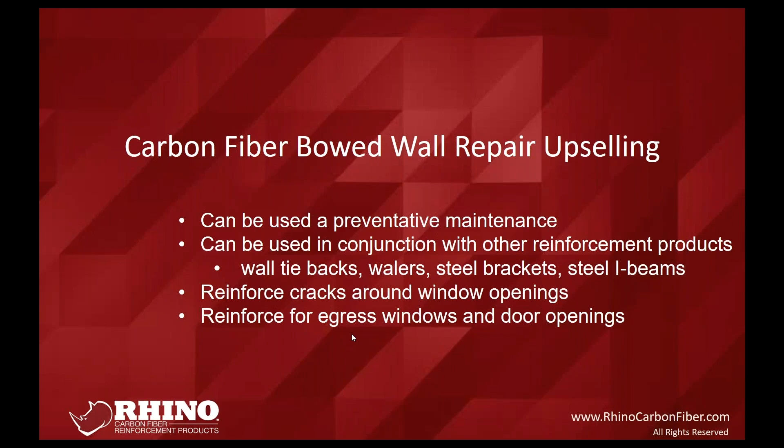So that's something that you guys can kind of kick around and see if that would be something that would work out for you. So yes, we've already talked about working with other types of reinforcement repairs, and then the window openings and egress windows. Again, Tough Wipes are great. They're not expensive.

I had a crew that was out in the middle of winter. They were heating up their epoxy in the truck up on the defrost. The guy grabbed it, didn't realize it was going to be that hot, tossed it out of his hand, it hit the concrete pad, and exploded on the garage door of the homeowner's house. Fortunately, he had some Tough Wipes on him. He cleaned it up, and the door was cleaner than the one next to it.

So they're worth their weight in gold. We've had guys that have gotten epoxy out of their hair with them. If nothing else, just not having to manually pull epoxy out of your arm hair is worth the $20 they cost.

Last thing we always talk about, guys, is our marketing support that we offer. It's something that we want every one of our customers to utilize. So we have a pretty big offering as far as what we can help you with. We have animated presentations. We have PowerPoints and slideshows that you can use at the time of your inspections and sales calls. We have sheets that you can print off and take with you to those appointments and leave behind.

We do a ton of case studies with our contractors, and that's something that we really like to be part of. That makes us a stronger company and you guys a stronger company. So if you guys do a cool project or just a normal installation, it doesn't matter, send us some information and some pictures of it. Put it on your Facebook or LinkedIn or Instagram, tag us in it, and we'll reshare it. We'll discuss it.